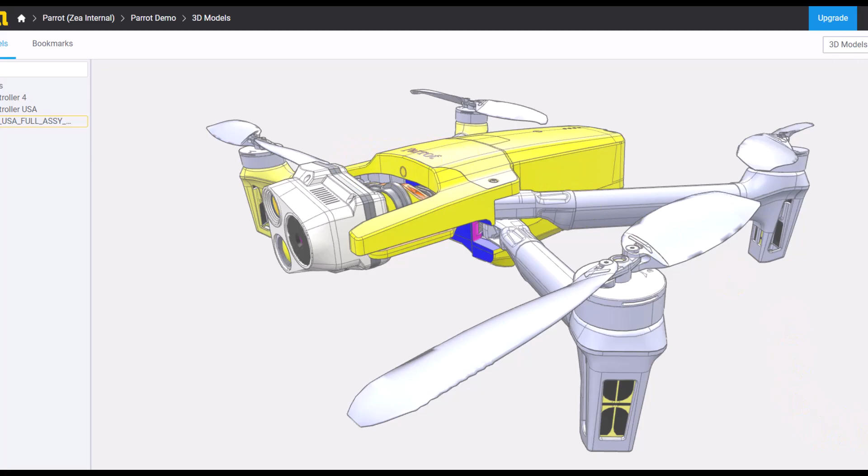What the inspector does is it basically operates as a free CAD viewer. So you can come around, move things around, but nothing ever gets saved unless you save it. So I'm just going to click Ctrl-Z and bring that back to its neutral place.

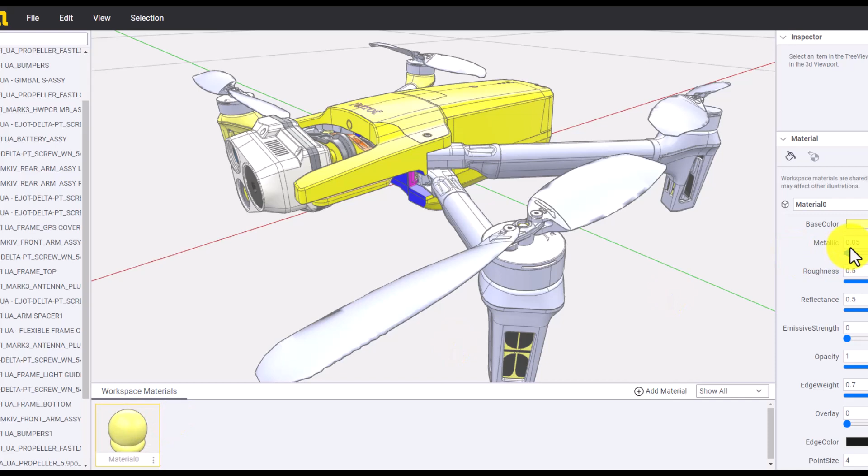Next, I'm going to want to create a color, or I guess a material in our case, to make the drone look black. So let's come over here and maybe we'll go into the blues and pick a color that's something like that. It's not going to be perfect, but it's going to be good enough. And from there we can just start painting everything the right color.

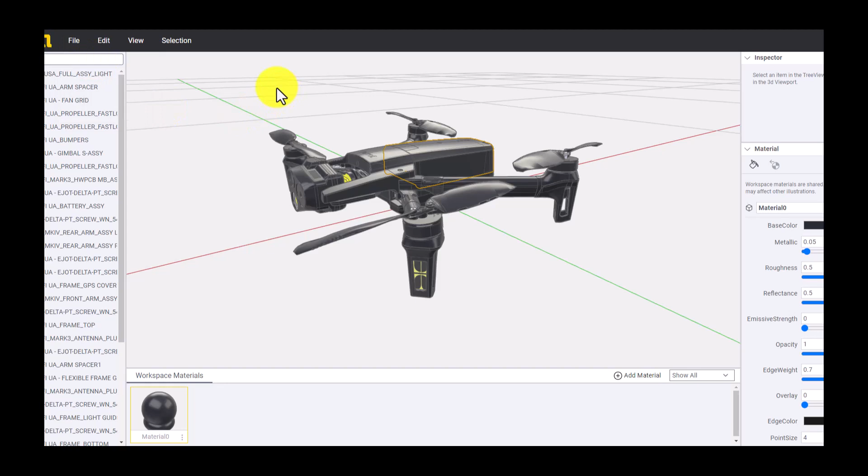All right, so let's say that this is good enough for us at the moment. I'm just going to come up here and click Save. Super important because we're going to go create a technical illustration now, and we want all of this coloration to be included. So I'm going to close this down. Now that we've got the drone all colored up, let's go create that technical illustration.

So we're going to enter into Zea Illustrations and create a new project. You can call it really anything you want, so let's not be too creative and just call this technical illustration. It's going to open up blank as an empty project. The next thing we're going to do is go get that model that we just cleaned up. We don't have too much stuff, so it's pretty easy to find, and let's add it to the project.

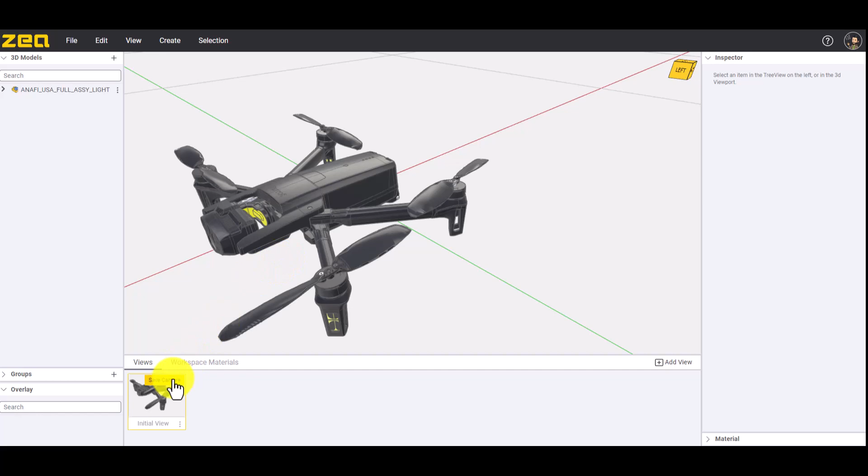Next, we're going to click Save Camera. Because we're going to be removing the battery, we're going to position the drone a little bit closer to the bottom left corner, and create a call out saying this is the battery. So I'm just going to Control A to highlight everything. We're going to call this battery, and we actually want this to be a rectangle. With this, quite happy. So let's create a new view.

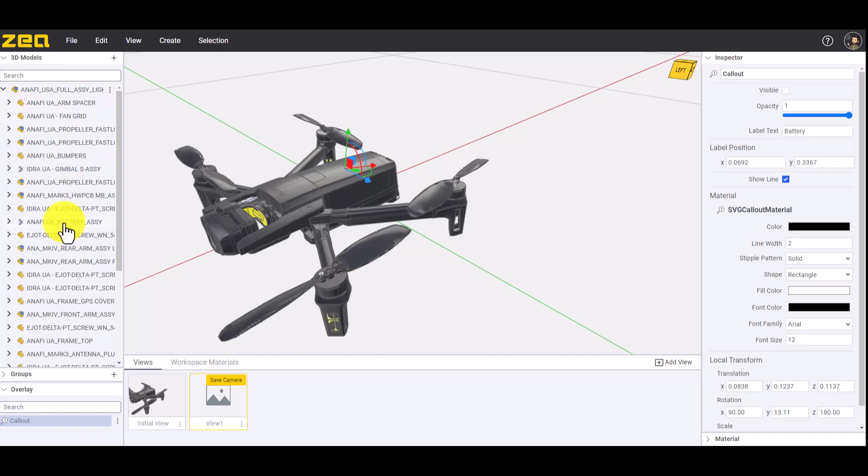From this new view, we don't actually want the call out to be visible. So let's remove that. And we're going to come down here and choose the battery. This is the assembly that contains the whole battery. Let's slide it out and save camera. So now we have the battery assembled with the view and then the battery removed.

This pretty much concludes the technical illustration, but there's one last thing that I really want to show you. You can go into File, Publish, and publish this project. What's really interesting is from here, we get a link that you can embed either on your website or share. Right here I'm previewing the link that we just created with these two illustrations. We have the option to choose always current or choose the version. We can also choose to display the views or not.

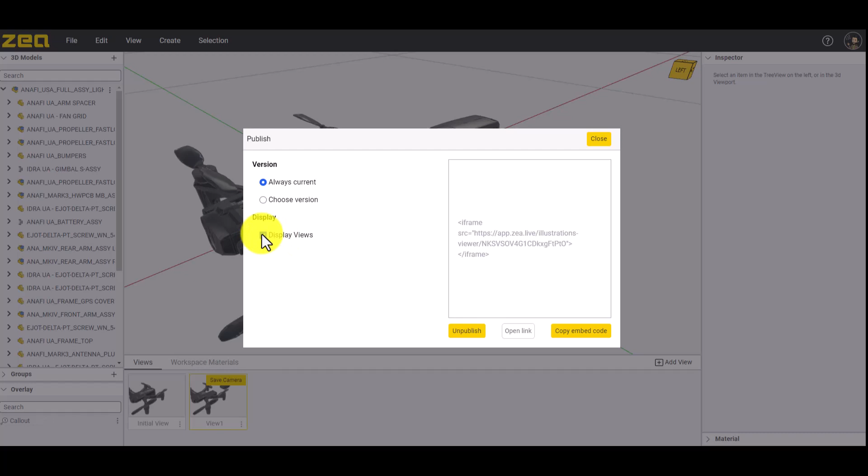We're going to keep the views displayed because there's something really important that we forgot to do, which is here with the battery removed, we actually want to add a call out. So let's add another call out and we'll just call this one battery removed, for lack of creativity. Let's update this view.

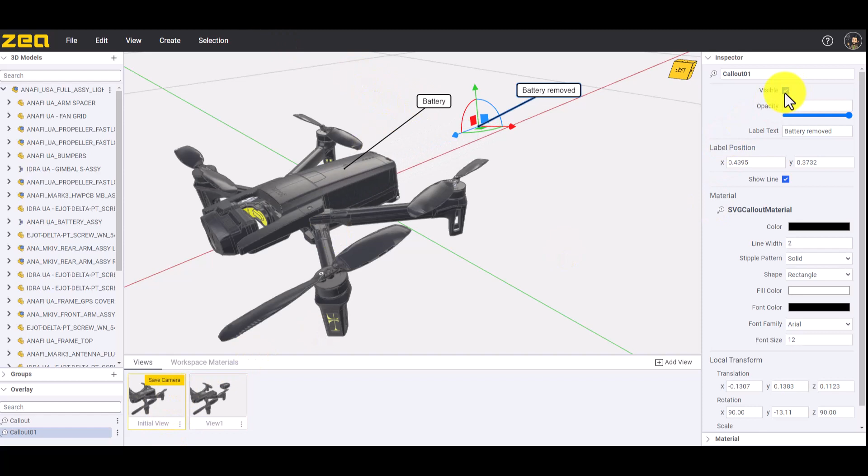Next, if we come back over here to the published view, what's super interesting is that we now have, whoops, I should have updated the first view. Let's come back over here to the first view, and the battery removed is definitely not supposed to be visible. Let's refresh this. And we have the battery removed.

So this is how easy it is to update technical illustrations that have already been published, whether on your website, in a technical training course, a live presentation, or anywhere else. There you have it, technical illustrations using Zea Illustrations.